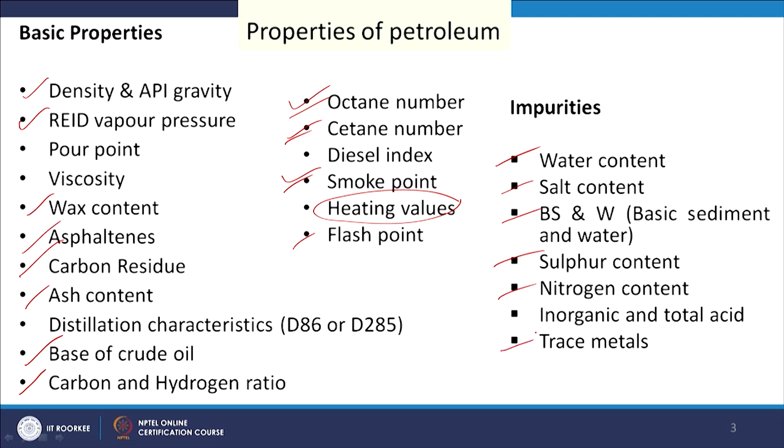So, these are the different properties of crude oil, and we will discuss the importance of these and how to measure these properties. At first we will see density and degree API or API gravity. As you know, density is nothing but mass by volume of any substance, and specific gravity is also used, m by v divided by m' by v', that means with respect to water. So, the density of any material divided by the density of water at 4 degrees centigrade, that is specific gravity.

In a similar way API gravity has been defined by the American Petroleum Institute, that is 141.5 by specific gravity at 60 degrees Fahrenheit, minus 131.5. This is the definition of API gravity as per the American Petroleum Institute, and it is used to clearly understand the difference between the fractions of petroleum crude. For example, if we consider water, the API gravity will be 141.5 minus 131.5, that is 10.

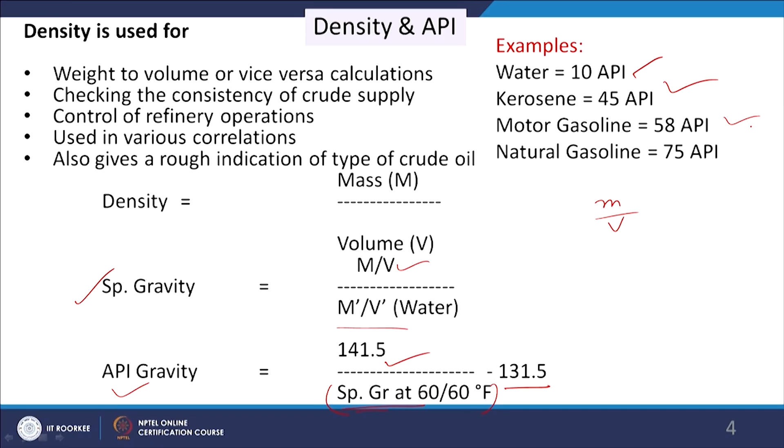But if it is lighter than water, the specific gravity will be less, so the API will be more than 10. For kerosene we get 45 API, for motor gasoline we can get 58 API, and for natural gasoline we can get 75 API. So, higher the API, lighter the fractions of the product we are considering.

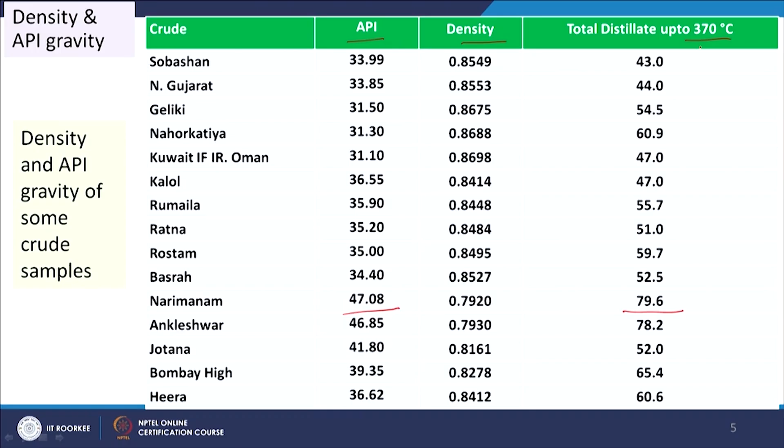Now, we will see some examples of density and API and total distillate up to 370 degrees centigrade. These are the sources of different crudes. If we see, the maximum API here is 47.08, and here we see the maximum distillate. So, the more the API, the lighter the crude, which is why the value of the distillate product obtained at 370 degrees centigrade is higher.

Another property is Reid vapor pressure. Reid vapor pressure is indicative of the extent of volatiles present in the crude. It is determined under specific conditions, that is 37.8 degrees centigrade, and it is measured as per ASTM D 323. So, the more the vapor pressure, the more the lighter fractions in the crude. For example, in petroleum crude we get C2 to C80 or more than that. So, C1 is very less in this case.

So, C2, C3, C4 and C5 fractions produce the LPG. How much LPG we can get from that crude is indicated by the Reid vapor pressure. If we consider propane, this vapor pressure is 14.1 kg per centimeter square, for butane it is 6.6 kg per centimeter square, whereas for crude oil it is 0.01 to 0.05 kg per centimeter square.

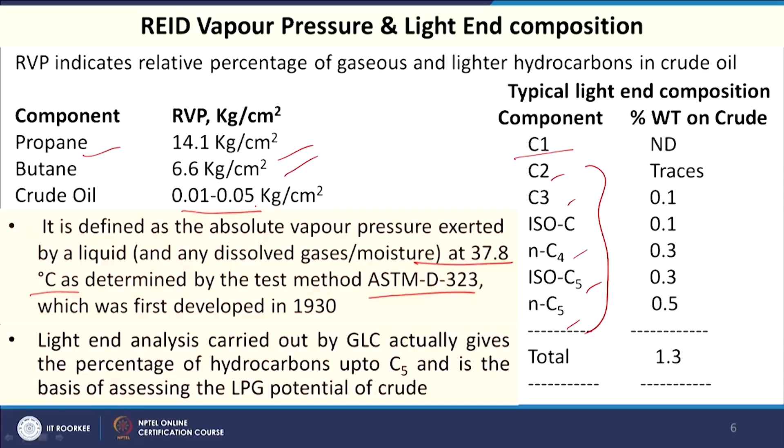Another property is pour point and wax content. Pour point indicates the flowability; it is the temperature at which the fuel ceases its flow. It is related with the wax content also: the more wax, the easier it is to cease the flow. Alongside the viscosity, this is also used for pumping design.

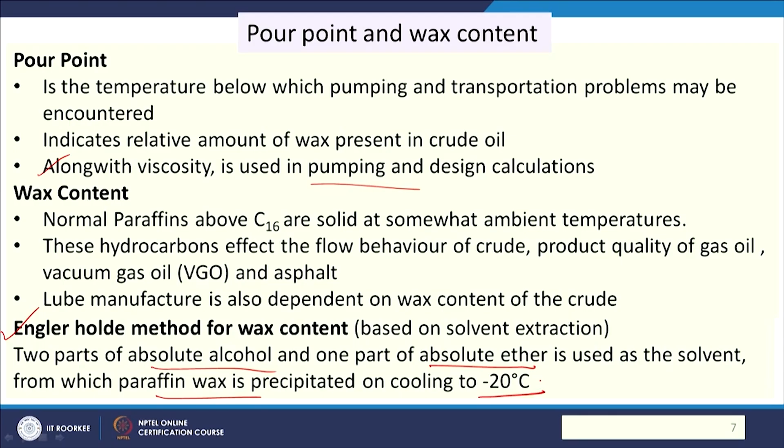And then wax content: as you know, paraffins having more than 16 carbons are solid. These solidified paraffins are considered as the wax, and this is determined by the Holde method, which is based on solvent extraction. As shown here, an absolute ether and absolute alcohol solvent system is used, and the paraffin wax is precipitated at minus 20 degrees centigrade. So, this is the method of determination of the wax.

Now, we will see the asphaltenes, carbon residue and ash content. These are also important parameters of the crude oil. Asphaltene is basically related with the residual part. The more asphaltene, the more vacuum residue we will have. These are polynuclear condensed aromatic compounds, and their solubility differs in different solvents, which we can take advantage of for determination: they are insoluble in heptane and soluble in benzene and toluene.

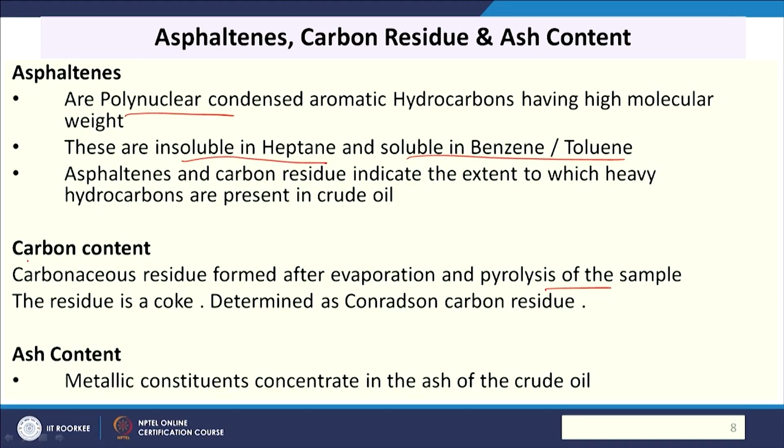Next is carbon residue. Carbon residue is a carbonaceous material: if we evaporate and pyrolyze the oil at specific conditions, some residue will remain. That residue is called carbon residue, and the Conradson method is used. Ash content we can measure from proximate analysis, and just like coal, ash content here is related to the mineral matter present. Metals present also contribute to ash, and we can convert the ash to dry basis and wet basis as provided here.

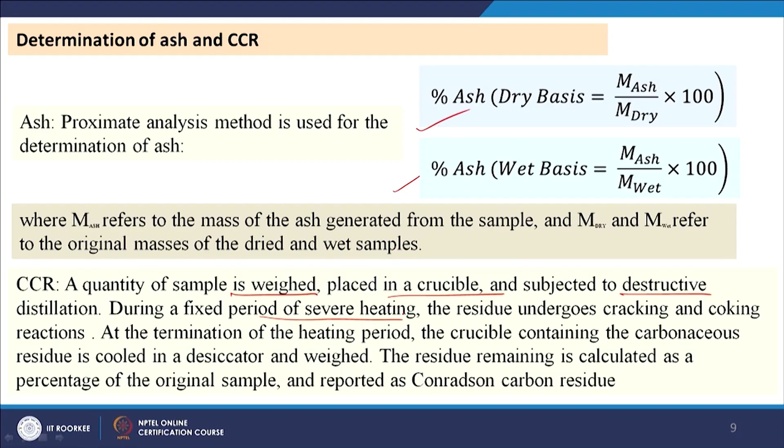Conradson carbon residue we can determine under specific conditions. We take a certain weighed amount of material, place it in a crucible and subject it to destructive distillation for a fixed period by severe heating. After that we collect the residue, and how much is left is considered the Conradson carbon residue, expressed as a percentage of the original sample.

Salt content is also one parameter of the crude oil. When the crude oil is taken out from underground, it contains different types of material including water and salt. These salts are basically sodium, potassium, calcium and magnesium chloride, and they can be present as crystalline solid or dissolved in water, which can form an emulsion with the organic phase in the crude oil.

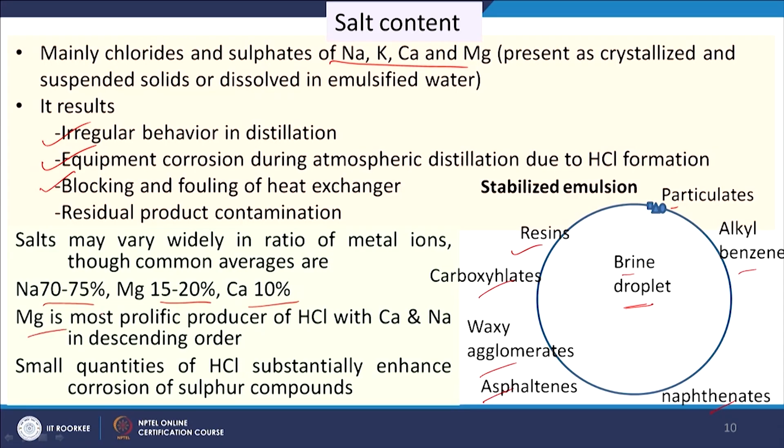It will create pollution, give irregular behavior in distillation, foul the heat exchanger, and also cause equipment corrosion. So, these are the disadvantages of the salt. Among the different salts, typically sodium is 70 to 75%, magnesium 15 to 20%, calcium around 10%, and magnesium salt mostly gives HCl, which is corrosive in nature.

For the determination of this salt, some methods are available: silver nitrate and KCNS methods by titration, or conductivity measurement based on standard sodium, calcium and magnesium chloride solutions in mixed alcohol. These are the methods used for its determination.

Then the metals available in crude oils are mainly lead, nickel, vanadium and copper. They also contribute to the ash; when burned, soot and particulates will be formed, and they poison the catalyst.

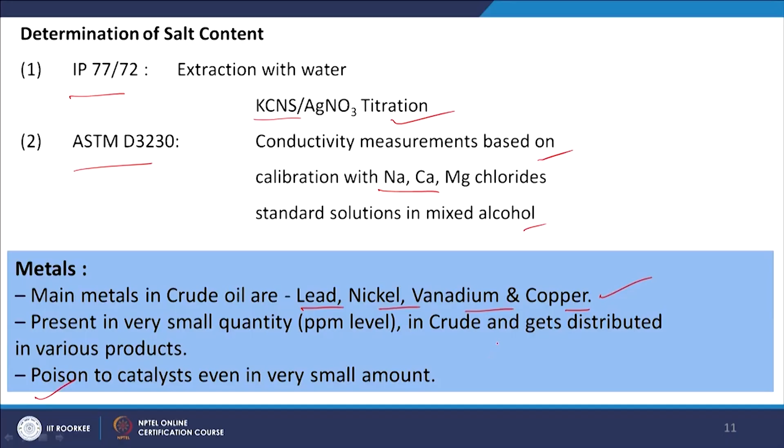So, the lesser the metals, the better the quality of the crude or of the derived product from it. Now, this can be measured by using atomic absorption spectroscopy. Another property is sediment and water.

So, as we told, when the crude oil is taken out, it contains salt and different types of sediments, which are basically sand, clay, volcanic ash, drilling mud, rust, iron sulphide and metals, and different types of scales. So, these contribute the sediment, and water is already available in the crude oil.

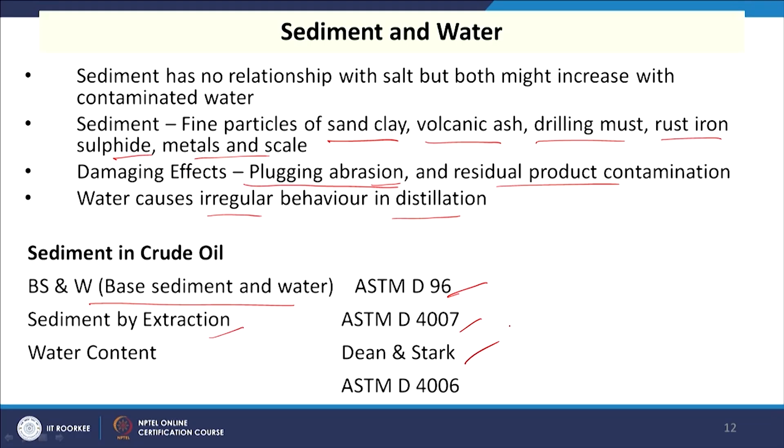So, the presence of these affects the process of refining, and it causes damage: plugging, abrasion and residual product contamination. These are the important effects of these contaminants on the crude oil, and water causes irregular behavior in the distillation. For the measurement of this there are a number of methods, that is base sediment and water measurement, ASTM D96, sediment by extraction ASTM D4007, and water content Dean and Stark or ASTM D4006 method.

Now, we will be discussing some properties of the refined products, that is octane number. Octane number is a property of gasoline and it is related to its knocking property. It indicates the resistance of a motor fuel to knock. So, the higher the octane number, the better the quality of the gasoline. This is also called octane rating, and octane numbers are based on a scale on which isooctane is 100 and heptane is 0.

So, if we have a fuel which burns in a similar way, having similar knocking property to a blend of isooctane and heptane, the percentage of isooctane in that blend will be the octane number of this fuel. For the determination of octane number, a standard machine is used in the laboratory.

The octane number we get in that case is called research octane number, and it is determined by running the fuel in a test engine with a variable compression ratio under controlled conditions, and comparing the results with those for mixtures of isooctane and n-heptane. As I told, the percentage of isooctane in the mixture having similar knocking behavior will be the octane number.

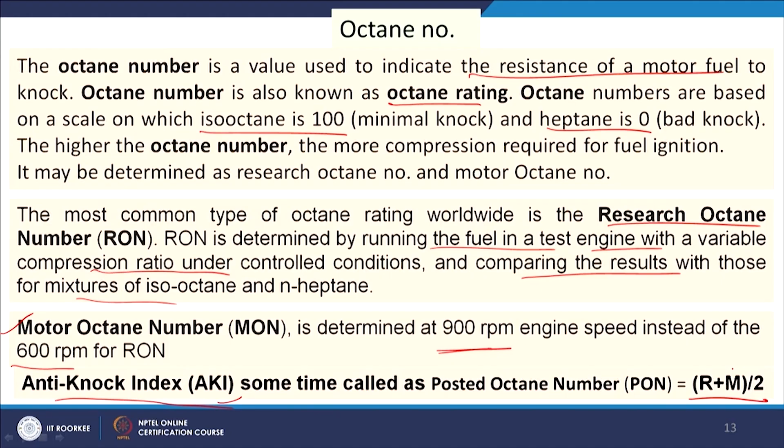Another property, the anti-knock index, is also used in some countries to get the knocking behavior of gasoline, and this is defined by (R + M)/2, research octane number plus motor octane number divided by 2. Then we come to cetane number. Cetane number is the property of diesel.

It is a relative measure of the interval between the beginning of injection and auto ignition. How much time is left is the indication of the cetane number. Like octane number, there are two compounds here: cetane, which has number 100, and 1-methyl naphthalene, which is 0, and isocetane is 15. So, 0 and 100 will be blended in different ratios and used in the specified machine, we will get the delay period, and the percentage of cetane will be the cetane number.

So, cetane number is measured by burning the fuel in a cooperative fuel research engine under standard test conditions. A hand wheel is used to increase the compression ratio, and this compression ratio is increased until the time between fuel injection and ignition is 2.407 milliseconds.

Then the cetane and 1-methyl naphthalene mixture is used in a similar way at the same compression ratio, the time requirement is considered, and for the composition having the same time, the percentage of cetane in that mixture will be the cetane number.

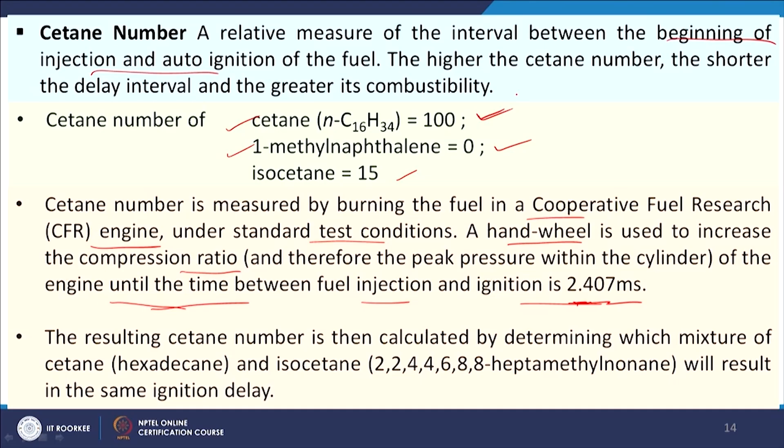Another is aniline point and diesel index. For diesel, cetane number is measured; for other fuels like lubricating oil, diesel index is measured, and diesel index is defined as aniline point in degrees Fahrenheit times API gravity divided by 100. So, aniline point is measured first, then diesel index. So, what is aniline point? It is the temperature at which equal volumes of aniline and the lubricating oil will be mixed.

So, if we get that temperature, we will put it here. If we have the degree API of the fuel, then we will multiply it by it and divide by 100, and we will get the diesel index.

So, next is acid value. Crude also has some acids; organic and inorganic acids may be available in it, and total acid content we can measure by its titration with a base solution. It is defined as total acid number, TAN, that is equal to mg KOH required to neutralize all the free acids per 1 gram of crude. So, this is our total acid number. Similarly, total base number is also determined by titration using perchloric acid.

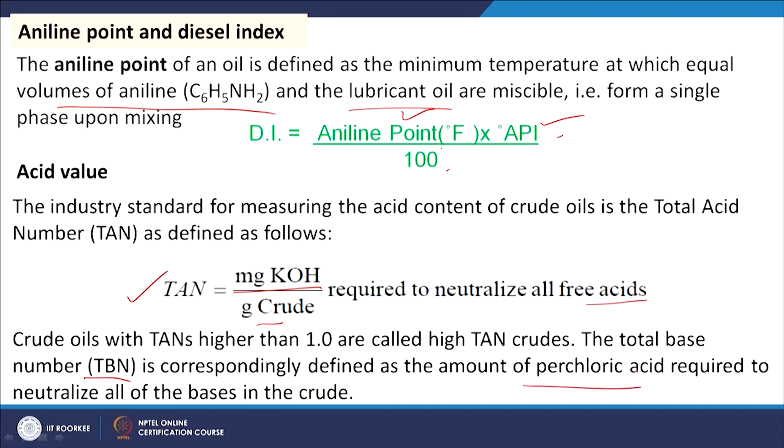Viscosity is another property of the crude oil which is very important for its transportation and for pumping purposes. As you know, viscosity indicates the resistance when one fluid layer flows on the other layer. It also refers to the thickness of the oil and is determined by measuring the amount of time taken for a given measure of oil to pass through an orifice of the specified size.

So, for the determination of viscosity, with a simple arrangement we can pass the fluid through an orifice and measure the time it takes. Because this is a flow through a porous channel, we can use Poiseuille's equation: eta is equal to pi r^4 p t divided by 8 V L, where eta is the viscosity coefficient, p is the hydrostatic pressure, t is the time of falling, V is the volume of liquid collected, L is the distance travelled by the liquid during time t, and r is the radius of the tube.

So, in this formula, the radius of the tube is fixed, the volume V of liquid we are collecting can also be targeted and fixed, and L, the distance travelled by the fluid, is also fixed for the system. So, we get eta is equal to k into p into t, where p is the hydrostatic pressure, which is related to mgh, so the mass of the oil. So, eta is proportional to k m t, because p is proportional to m.

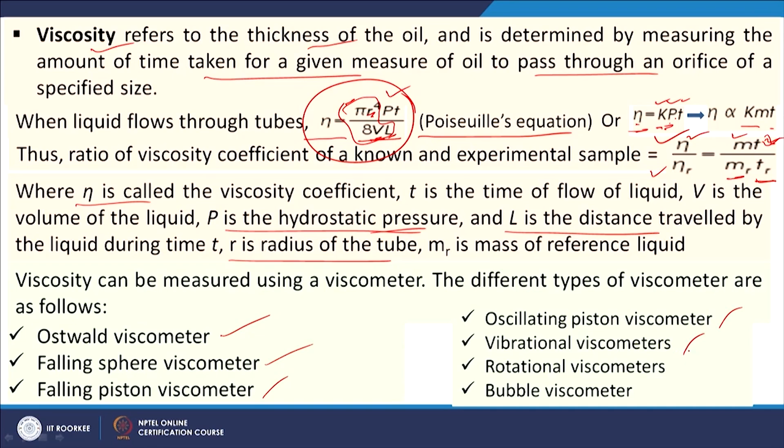This viscosity can be measured in different ways as mentioned here. There are viscometers: Ostwald viscometer, falling sphere viscometer, falling piston viscometer, oscillating piston viscometer, vibrational viscometers, rotational viscometers and bubble viscometer. Another property is flash point.

So, if we heat any fuel, it will produce vapors. If we bring a matchstick for ignition, a temperature will come at which sufficient vapor will form and a flash will take place for the first time. That temperature is called flash point. If we apply more heat, the temperature will increase, more vapors will form and fire will take place, and the minimum temperature at which fire takes place is called fire point.

So, flash point and fire point are properties of the liquid fuels produced through the refining of petroleum crude, and they are determined in open cup and closed cup systems. In the open cup system, the flash point varies with the height of the flame above the liquid surface, and at sufficient height the measured flash point temperature coincides with the fire point.

But in case of closed cup there is a lid and we bring the ignition source for a moment and we get the flash. So, it has been shown that the values of flash point in case of a closed cup are normally lower than those obtained through open cup, typically 5 to 10 degrees centigrade lower.

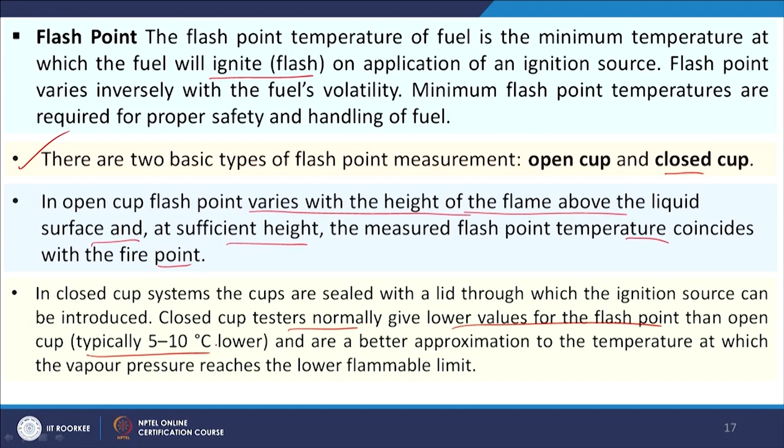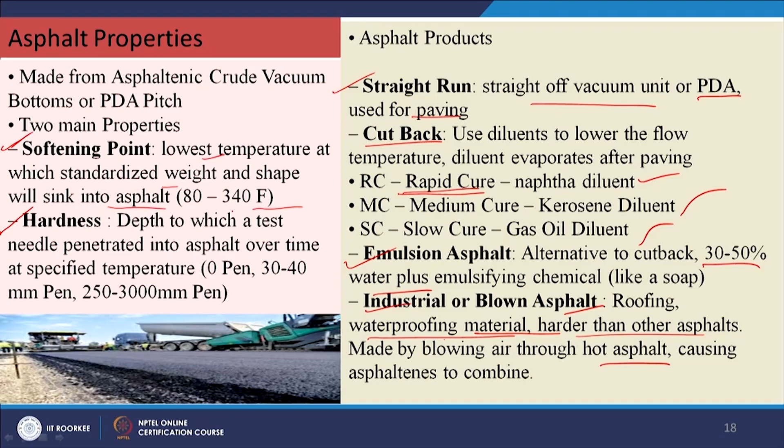The softening point is the lowest temperature at which a standardized weight and shape will sink into asphalt, around 80 to 340 Fahrenheit. Hardness is the depth to which a test needle penetrates into asphalt over a time at a specified temperature, under certain maintained conditions. The depth the penetrating needle goes inside is related to hardness. So, 0 pen, 30 to 40 millimeter pen, and 250 to 3000 millimeter pen are reported.

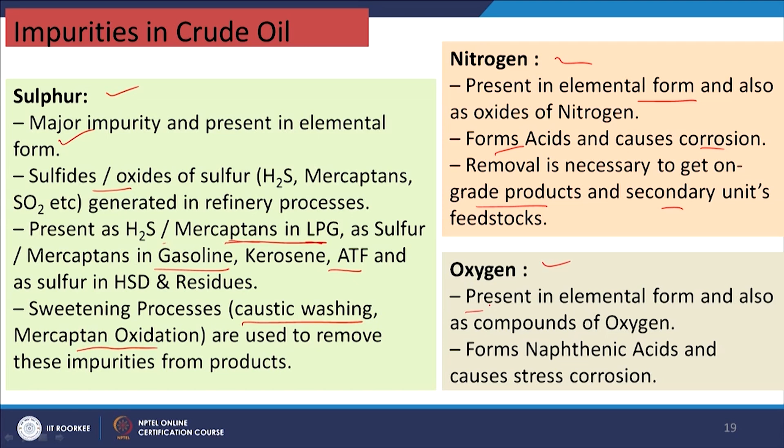Nitrogen is present in elemental form and also as oxides of nitrogen; it forms acids and causes corrosion. So, removal is necessary to get on-grade products and secondary unit feedstock. Oxygen is present in elemental form and also as compounds of oxygen; it forms naphthenic acid and causes stress corrosion. Now, sulfur content may vary: low sulfur up to 0.5%, medium 0.5 to 0.8%, or high, greater than 0.8%.

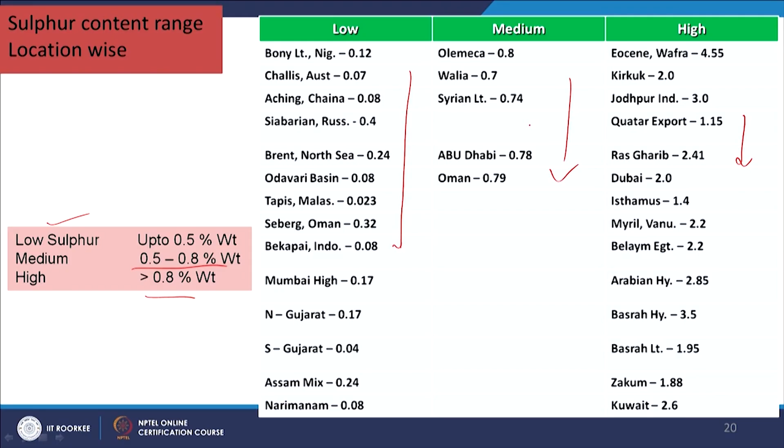These are some examples of different crude oils and their sulfur content, so we get medium and high as well as low. For methods of sulfur determination, there are a number of methods. Some important ones are the colorimetric method, also known as the barium sulphate method, the wickbond combustion method, X-ray fluorescence and ICP-MS.

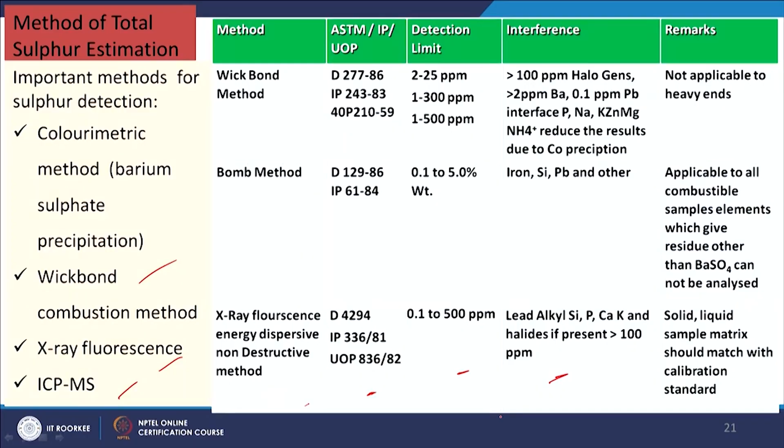These are the different methods I have mentioned here, with the test numbers, detection limits, and the compounds or elements which can interfere with the detection. For nitrogen, it gives poor color stability of products, poor stability in storage and handling, and poor quality of feedstocks for catalytic processing. So, removal of nitrogen is important and required.

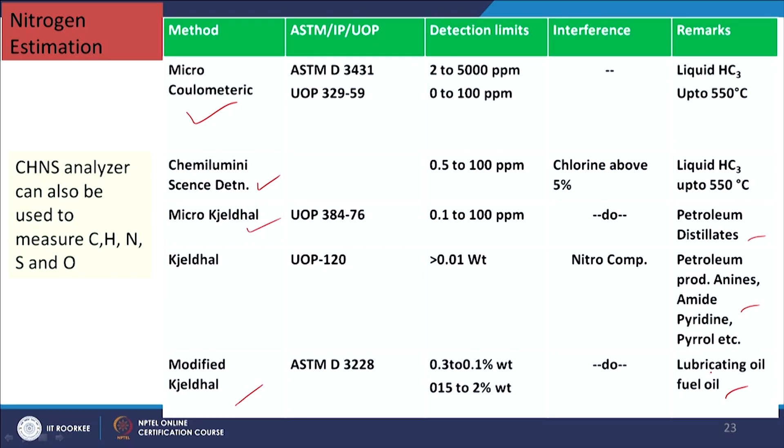So, up to this in this class on the characteristics of crude oils and petroleum products.